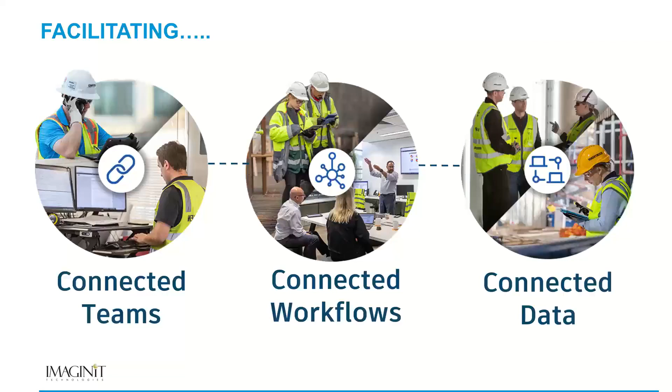So with the BIM 360 or Autodesk products that are now available. BIM 360 Docs, of course, is still available, as is BIM 360 Build. Those are still viable, available products. BIM 360 Model Coordination and BIM 360 Design have been renamed. Those are the only two products that have been renamed; the rest are still their original names. So BIM 360 Model Coordination became BIM Collaborate, and BIM 360 Design became Autodesk BIM Collaborate Pro. And then we have two brand new products, Autodesk Takeoff and Autodesk Build.

And again, the foundation for all of these tools, just like with the BIM 360 environment, is Autodesk Docs. That is the foundation document management tool for all of the unified platform, the Autodesk Construction Cloud tools. The unified platform, as it's now called, is still centered on Autodesk Docs as that foundational document management system. And then you purchase the other tools based on your specific needs. So we have Collaborate for clash detection, Collaborate Pro for Revit work sharing in the cloud, which includes clash detection, Autodesk Takeoff for quantification of your models or 2D files, and Autodesk Build for in-the-field construction management.

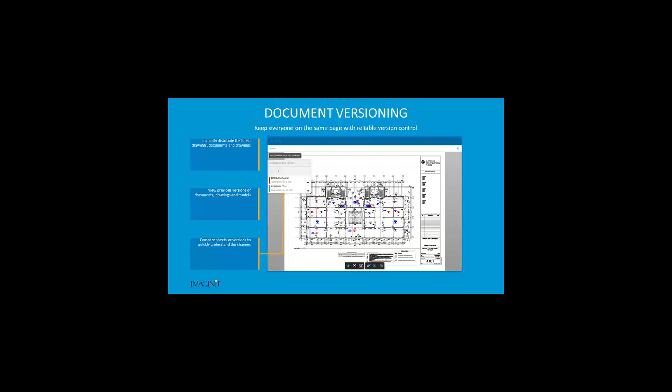So here in Docs, let me first open a Revit file that we have uploaded here. In this project, a grocery store is our sample project. So you could do comparison of versions in a 3D model like this, or you can do it on 2D sheets. We'll show you both.

So in this case, I'm looking at a 3D model of the store, and up here in the upper right is the compare tool. Let me just cancel to show you, this pull down will show you that there's multiple versions. And the most current is labeled just that, current. But this shows that I have 3 versions of this model that have been published.

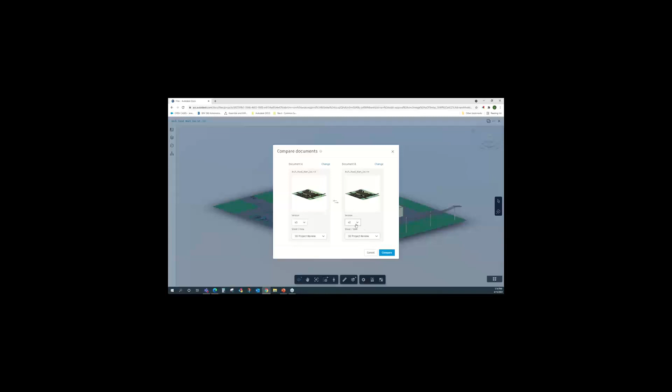So back to compare, let me just compare version 1 with version 3. And I'll hit that control. It'll take a second to refresh. And once that happens, it brings up this menu that allows me to filter and really hone in on how the 2 versions compare, what's been added, what's been removed. And bear in mind, these are on-off switches.

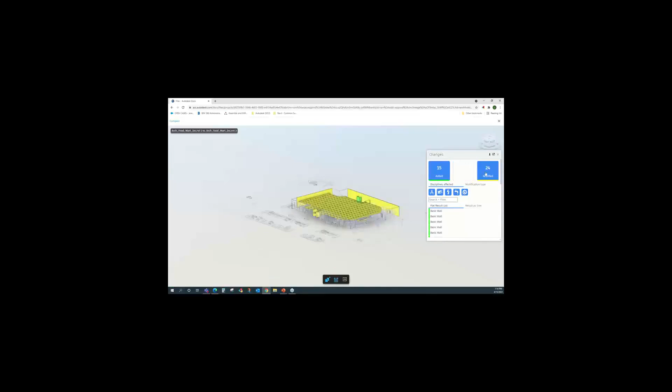So if I want to see added, if I select it, that turns it off. Whatever's turned on is what I'm looking at. So if I isolate just added, I'm seeing just the elements here that were added since version 1. Or if I just want to see what was modified, I'll just filter for that condition. And it's really, again, visually powerful to see some of the changes when it's overlaying the 2 versions together.

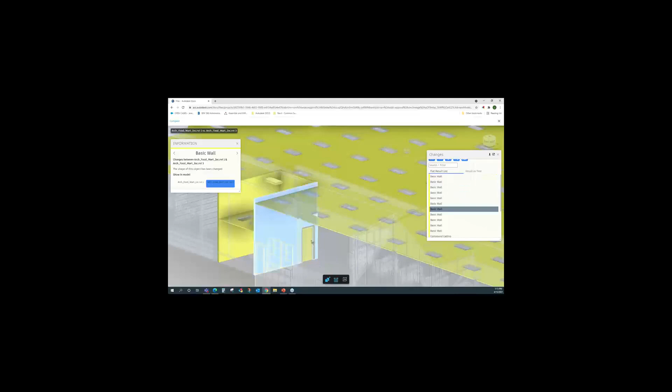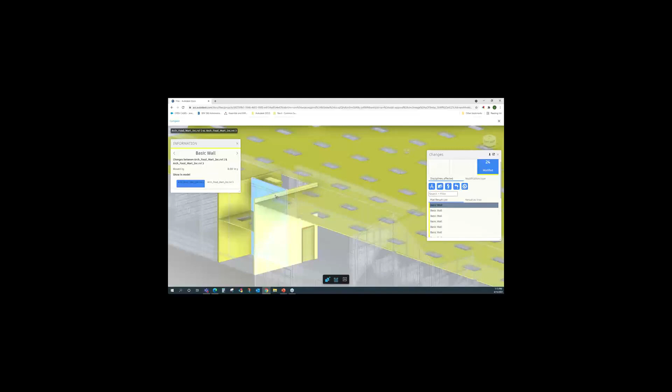So for instance, if I pick on this door, it highlights the 2 versions here, so I can see where it is in version 3. The door was over here in version 1. Or if I select this wall over here, again, there's where the wall is in the current version 3. It originally was back here. So you can kind of visually see the changes between revisions and very easily navigate through that with this menu.

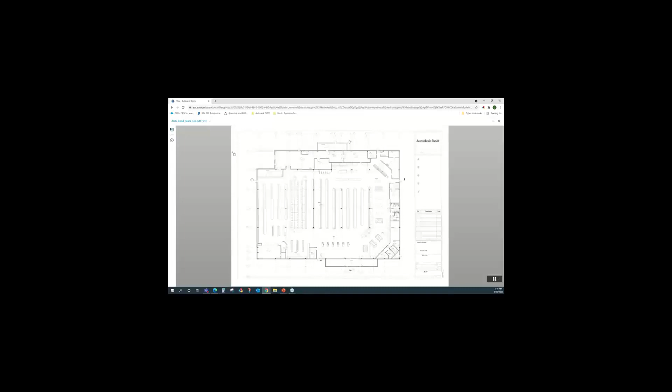That's in 3D. Let me exit the compare tool, and let me show that to you in another view. I'm going to open a PDF and show you another feature. And actually, there's another way to navigate to this, but since I'm here already, I won't waste the time on that. But there's a couple of ways to do versioning comparison.

But here in the 2D view, again, I can select the compare tool again in the upper right, and I'll do the same thing. I'll compare version 1 to version 3 and select compare.

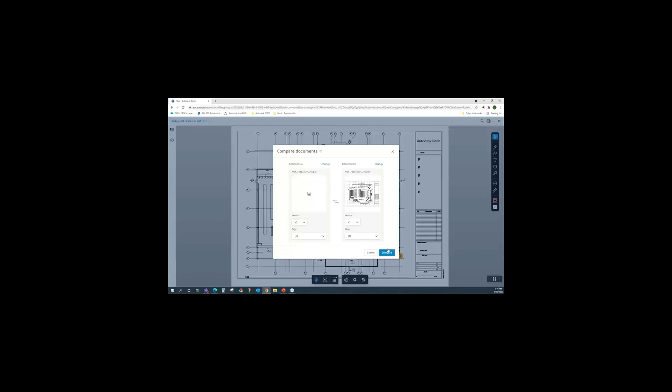And by default, it's a color-coded overlay of the two versions on top of each other. So red is the current, version 1 is the old. And it allows you just to look in one way, to kind of see what changed maybe in this area. You can see that red is new, blue is what was there before.

The other very cool tool is to almost see the evolution of the changes between 1 and 3. Under this comparison tool, you can switch from overlay to side by side. And when you do that, it gives you this blue slide bar. On the left-hand side is the current version. On the right-hand side is the old version.

And sliding over this blue line, essentially I can just walk through and see what changed between version 1 and version 3. That door swing went the other way. In the current version, they added an electrical closet here. And again, as I go through and see some of the changes, columns were added. And this door had to be more ADA compliant. They switched that swing. And down here, some cooler, maybe a meat cooler was added.

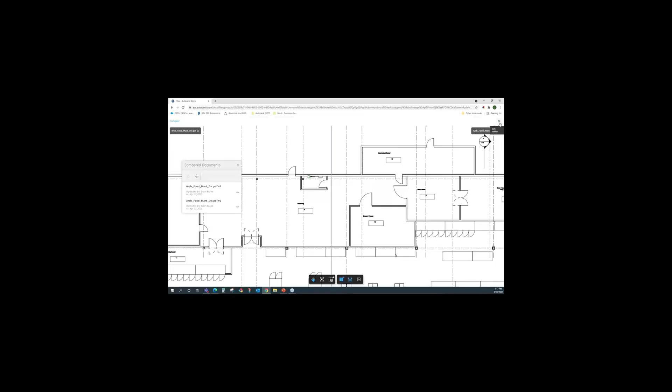So this is another very cool way to compare the changes between versions in document versioning. Again, that just ensures that people are looking at the right thing at the right time. So let's go back to our deck.

Another feature that is probably very familiar to many of you, whether it was on this platform or others, is the ability to do electronic markups, to communicate intent or to ask questions, and very easily point out something that needs to be clarified. Again, managing issues and communication during the project. Autodesk Docs comes with a very simple markup tool. Sort of what you see is what you get. But let me just demonstrate that briefly.

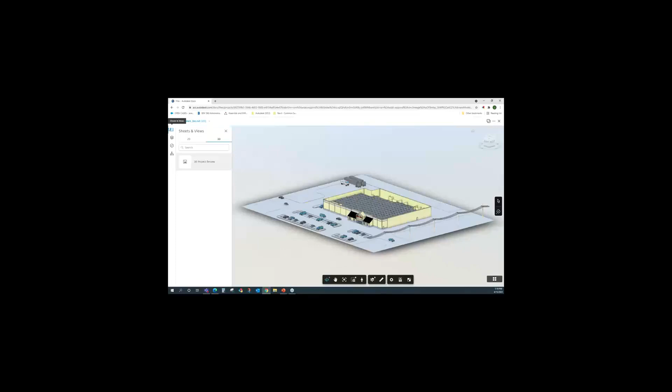So I'm going to go back to our Revit model. And over here, this little tab up here allows me to look at all the 2D sheets that were published as well. So I'm just going to open a 2D version of this Revit file. As you can see here, someone already did a markup, but simply to add a markup, you can zoom into an area and you see the tools over here. Pretty self-explanatory. I want to draw a cloud around this door.

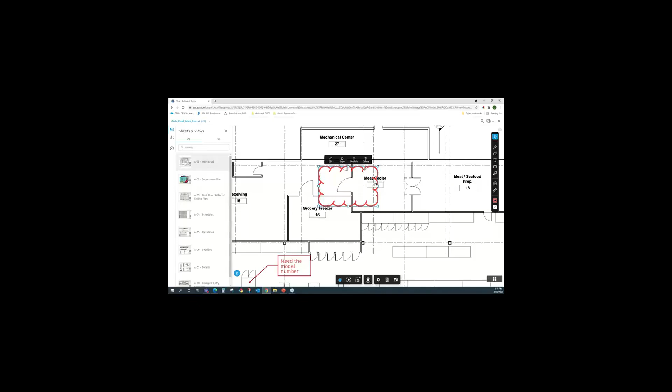The other thing you'll notice is I wasn't able to select the color or do any of those things when I drew this. But once I draw it, if I hit the edit tool, then I have all these menus to change the thickness of the cloud border or the line work. I can add some fill within the cloud if I wanted to, and control the opaqueness, or take away the fill by hitting the line. And here's how you control it after the fact.

I can also add a callout tool. Again, I'm holding my left button down and essentially placing it where I want and then letting it go. It immediately brings up an editor. So I can type in, is this door swinging? Same thing, control the color of the text, the size, and essentially just make it a little bit more legible for the reader. Very simple, straightforward text tools.

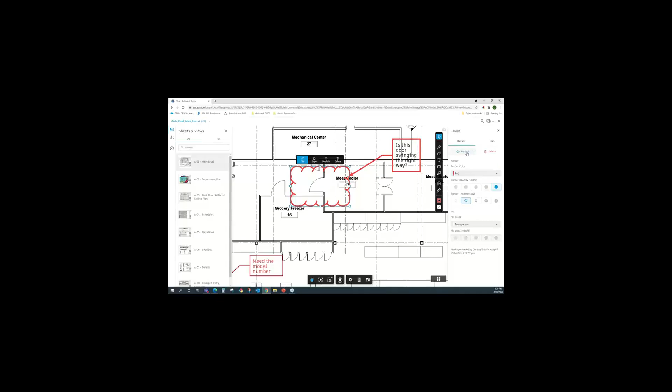And again, after you draw things, you can select them, edit them, and change the properties of those elements. So very easy to draw those changes. Now, the key thing is right now I'm the only one seeing this markup. In order for others to see them, I need to hit this Publish button. That makes it essentially public for anyone else to view the next time they look at this version of the Revit model. They'll see my markup when it's published. I can delete it and I can always unpublish it until I'm ready to share it with anybody else.

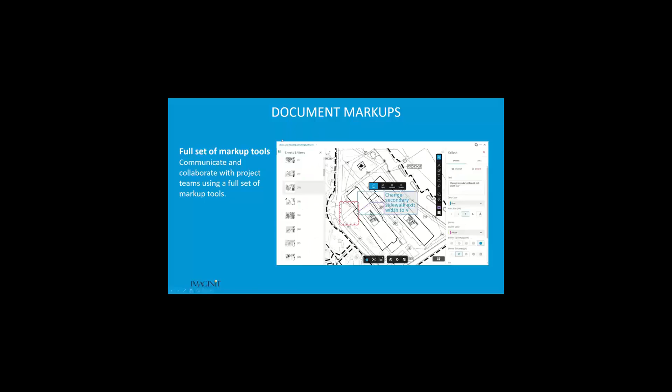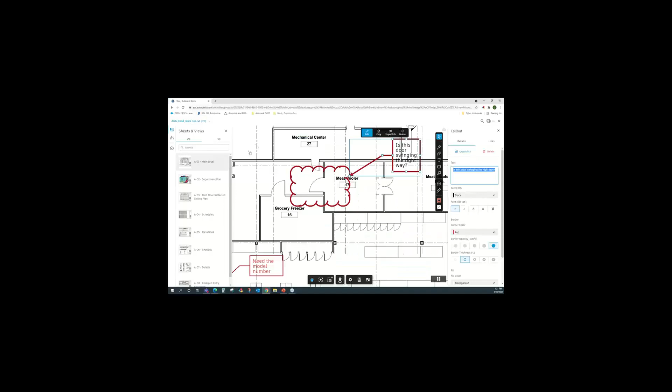So that's markups. Again, very simple tool. As with any project, there'll be issues along the way. And Autodesk Docs provides a platform and that repository to manage those issues, to ensure people are accountable for resolving them. So let's show what that tool looks like in Docs. In this same view, I created this markup just a moment ago, but now if you want to actually attach an issue that needs to be resolved or assigned to someone to resolve, you could do the same thing.

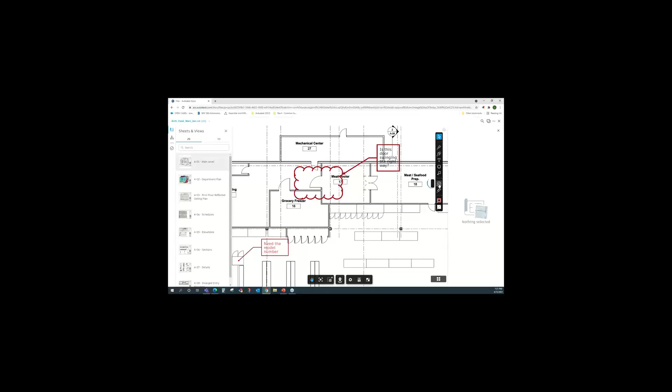So here in the same markup tool palette, you'll see a circle with a checkbox. That opens your issue menu. And out of the box, there's several issue types that are included that you can select from. So for this demonstration, again, just to be very quick about it, I'll select this as a design type and place that. And it just uses a shortcut D, which is what was programmed in there.

Again, that's customizable. And now that I've placed an issue here, now I can actually add some other fields and assign it to someone to be accountable for either getting me an answer or resolving it. So I could put a description, door swing, ADA compliant, question mark. You can assign it to a person here that is in the project. I'll assign it to Scott for now.

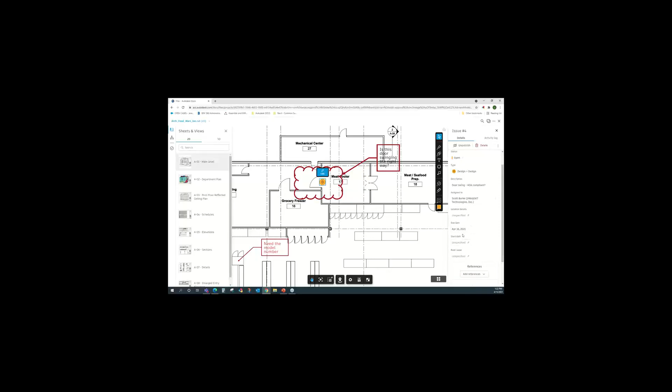Location, you can leave. You can give a due date. Maybe I'll give it a due date of Friday, and I can leave those other things, the start date unspecified. And of course, root cause, again, this is a pre-populated list out of the box, and something that'll give it a little bit more meaning or context. So I'll just say code compliance for the root cause. And now that issue is created, and it's related to this markup based on where I placed it.

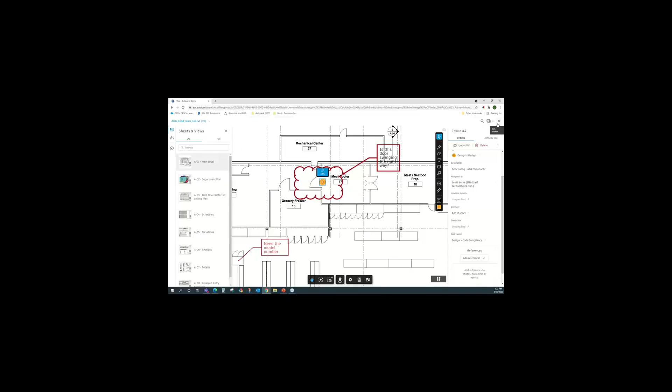So now just for a moment, I'll show you where those issues show up. So back here under issues, anything that was open is listed here. I can filter this list by what's assigned to me, or the type, or the root cause. There's all sorts of ways to filter this list. And so I can see who a particular issue is assigned to, and the status of it as well.

As I mentioned a moment ago, that list of types and permissions and root causes out of the box, there's several, but again, you can customize those under settings. So I selected types, and I can create different types or remove them or deactivate some of these. I can do the same for permissions. And again, I can create my own root cause. So that list of things that are available when you place an issue, project admins can customize that per your needs. So that's issue tracking.

Again, very simple to get to. It's in the same markup tool we showed a moment ago. And then of course, tracking the accountability of that under the issues tab, very simple to do as well. The next feature again supports communication and collaboration throughout the project, seamlessly allowing people to see drawings and content. Autodesk Docs supports 2D and 3D files. We've already seen it based on the files I've had for now.

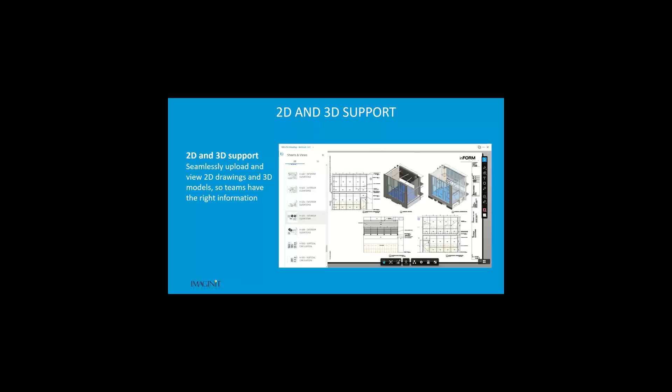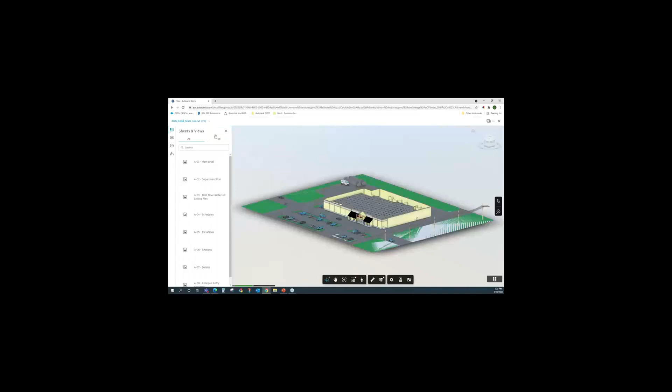Very simple to navigate, not only just to view, but to actually do things like walkthroughs. So let me just show you that briefly back in Docs. So let me go back to our 3D model again. And I'm going to start on a 2D view because it kind of illustrates a very simple way to look at a plan and then kind of situate yourself to take a look around in 3D.

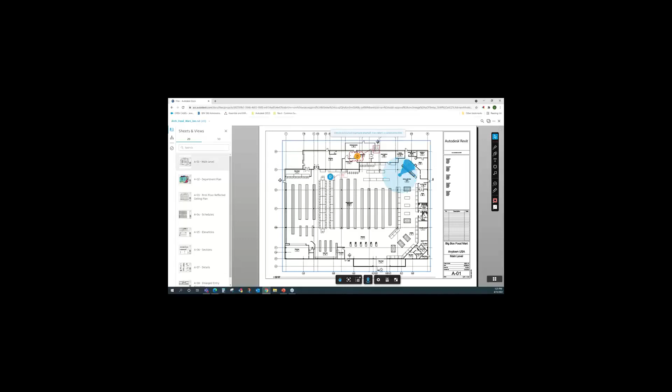So here in the 2D sheet of this main level, you'll see down here this sort of place me option. And I just select that, and I can pick a place here where I want to place myself, essentially, in the plan, and then orient which way I'm looking once this finishes. So I'll just kind of look towards this casework. And once I select that, it puts me three-dimensionally in that location and switches to 3D.

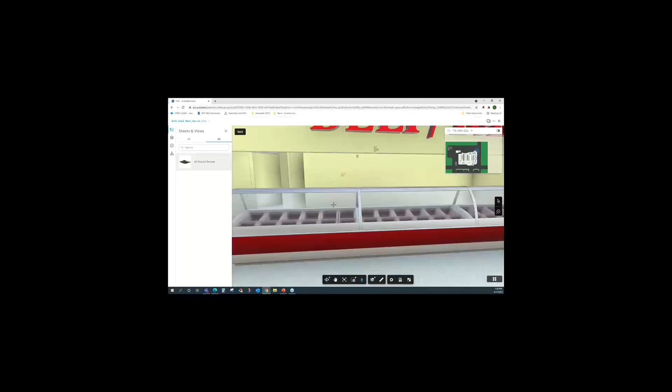This navigation tip, you may find it helpful as to how do I move forward, look around, walk backwards, orbit. You can always dismiss this once you get comfortable with it. But again, if I have a wheel on my mouse, just going backwards, as simple as that, just spinning to look around and navigate through the building. The performance is pretty good.

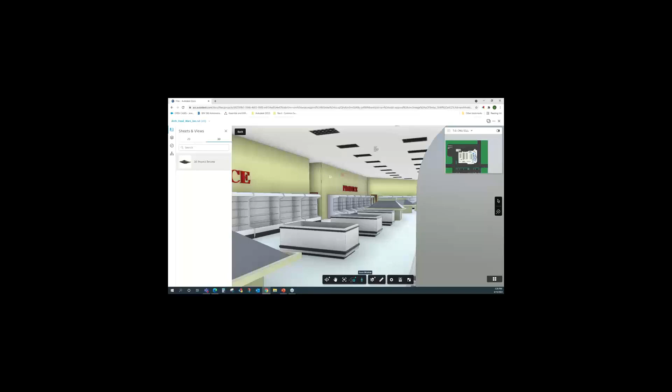Again, all of this is supported right on Autodesk Docs, so anyone who has access to the folder can quickly see not only just a 2D plan, but what that looks like in a 3D view with that placement tool. And there's also fly-throughs and other things that allow you to very easily see design intent with the latest documents. And of course then I can go back. I'll leave this up for now, so let me switch back.

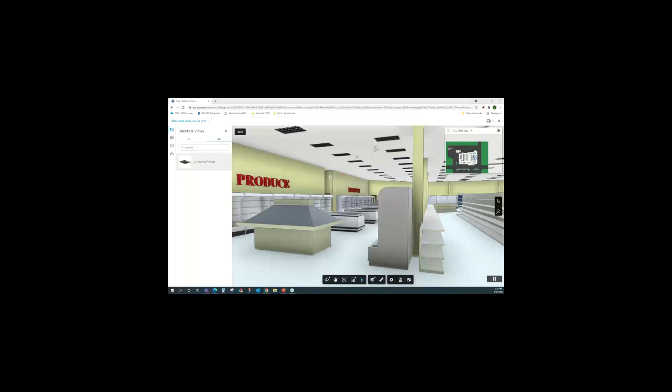The next feature is sharing files and folders, and this may come in handy if perhaps you need to share information with someone who is not a member of the project. So you have the ability to share public links with those who are not members of the project, and that'll send them an email with a link with the ability to download the documents that you share with them.